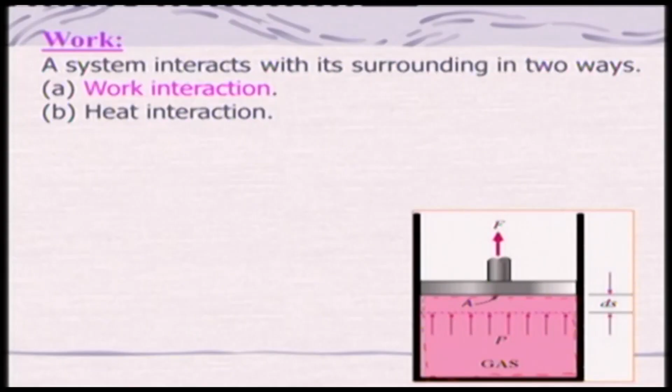which will be the system here, balanced by this force. And if this force is reduced by delta F, then the piston, earlier here, moves and its system boundary will increase. This is a movable boundary, right? And there is a displacement ds. So from the mechanics point of view, work is basically force into displacement, right?

As a result, you are at state 1 here, and as you go on decreasing the force, there will be an increase in volume of the gases in the system, and it will reach a steady state, another state 2. And all the time you can think that it is attaining quasi-equilibrium, because you are changing the force by a very very small amount, such that it will be attaining

mechanical equilibrium. One can also consider it a reversible process, because it is very slow, and there is no friction between the cylinder and piston or anything else which won't allow the system to move reversibly, or in other words, which would make the process irreversible. So from the mechanics point of view, the work done will be what?

If I take this tiny strip here, the piston has moved through distance ds, and the force acting is due to the pressure P from the system, and this is the surface area, so it becomes PA ds, and A ds is nothing but the change in volume. And if you integrate this between state 1 and state 2, you will get PdV, right?

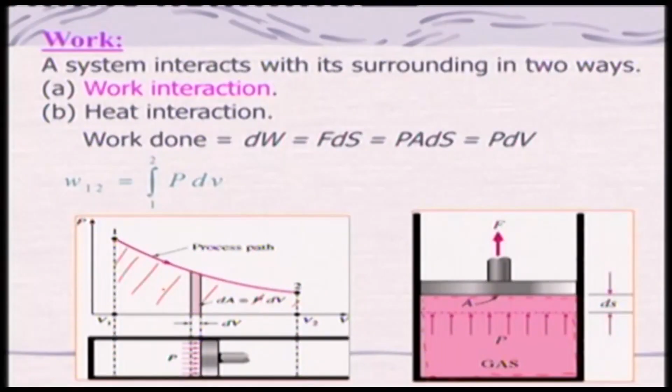And this integral is basically this area, which will give me the work done. That means in the PV diagram, this area will give me the work done, which can be expressed in kilojoules. Now, during this process, is the work possessed by the system or not?

See, if you look at the unit of work, it is kilojoule or joule, whatever you call it, right? But that is the unit of energy. Am I right or wrong? Yes or no? Is it energy? So, is work the same as energy?

Energy is possessed by the system, okay? Or if there is an interaction between system and surroundings, there will be a change in energy. But will there be a change in work also of the system? Actually, it is not. Basically, work is done by expending the energy. Okay, work is done by expending or by using the energy, right?

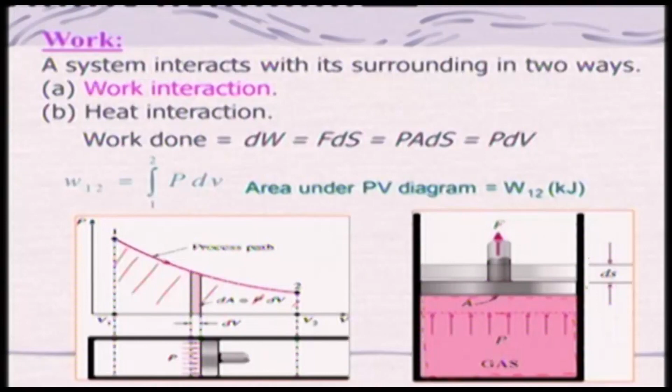But work is basically not the energy, it is the energy in transit. During the process it occurs. That means it is basically a boundary phenomenon. If you look at it this way, the piston is moving, right? Because that is the boundary, if you look at this, the system boundary is changing, right? Earlier it started here, and then after the displacement it has moved some distance. So therefore work, we call it a boundary phenomenon.

And it will be dependent on the path. Let's say it is going from state 1 to state 2; it can go through path A, path B, or path C, right? And if it is taking a different path, the work done will be different. For example, if it takes path A, it will be 10 kilojoule. If it is path B, it will be 8 kilojoule. And if it is path C, it will be 5 kilojoule in this example, right?

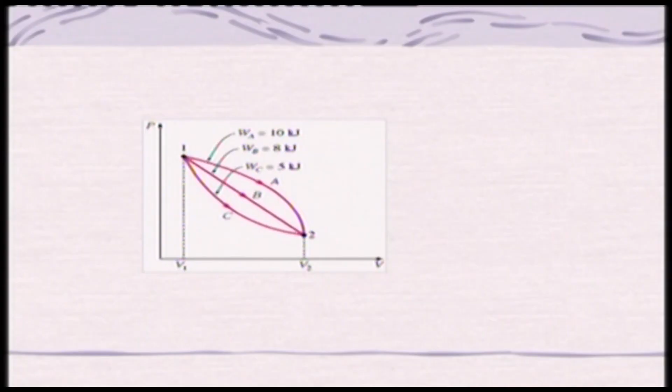That means work is basically dependent on the path. So therefore, work done can be considered a path function. It is not a point function. Whereas energy is basically what? Is a point function. Therefore, work is not a property of the system because it is dependent on the path. Energy is stored in a system but not work. Work cannot be possessed by the system, whereas energy can be possessed by the system.

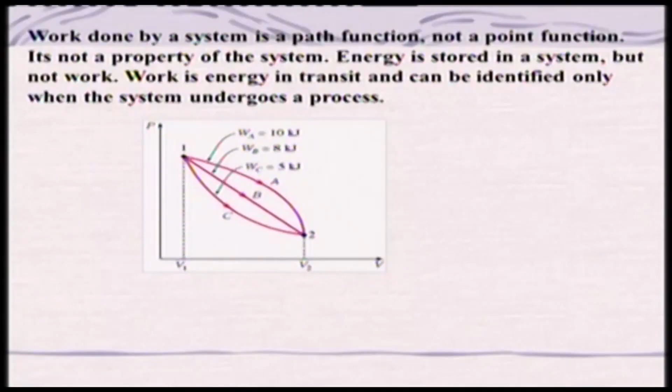So therefore, we call work energy in transit, which can be identified or manifested only when the system undergoes a process. If there is no interaction between the system and surroundings, then work done will be what? Will be zero, right? So therefore, one has to understand the difference between work and energy.

Let us take an example: a piston cylinder device initially contains 0.4 meter cube of air at 100 kPa and 80 degrees Celsius. That means volume is given, pressure is given, and also the temperature. Air is compressed to 0.1 meter cube in such a way that temperature inside the cylinder remains constant. This is basically an isothermal process. And we need to determine the work done during this process.

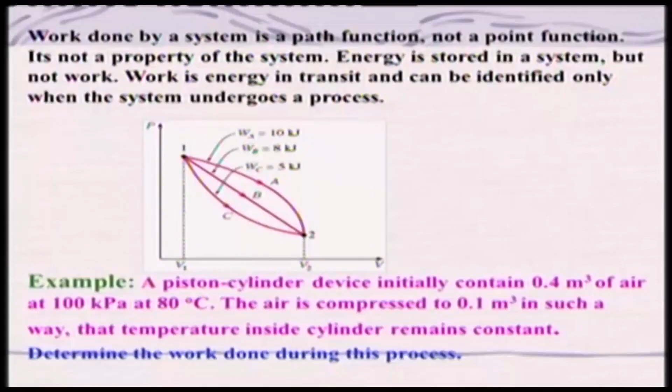So let us consider this is our system boundary, a piston cylinder arrangement with air at 100 kPa, initial volume 0.4 meter cube and temperature 80 degrees Celsius. It will be at state 1 here, and it will be compressed. That means we will be putting some weight here so that it is compressed such that the system attains a higher pressure, and we are assuming it is a quasi-static process.

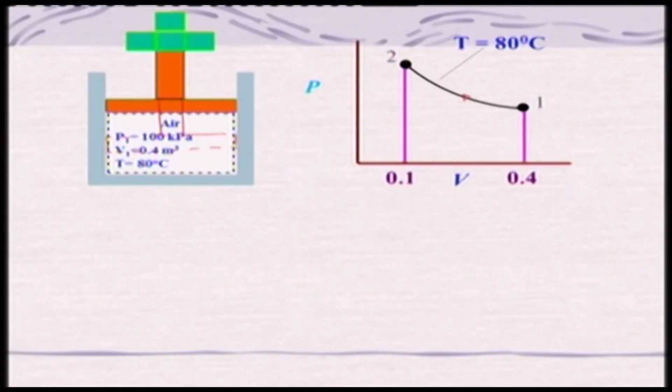So the process will go in this direction such that it attains state 2, at which the volume is 0.1 meter cube. Let us say the piston moves through this process. This is your state 2. So we need to find the work done. These things are given: V1 is 0.4 meter cube, V2 is 0.1 meter cube, P1 is 100 kPa and temperature 80 degrees Celsius.

So what we'll do, we can apply the ideal gas law. We know that PV is equal to mRT, and R here is the specific gas constant. If temperature is remaining constant, and mass is remaining constant inside the system, then this term is basically a constant C. So we get a relationship between P and V: P is equal to C by V.

And if we take work done equal to the integral of P dV from 1 to 2, you can put this relationship between P and V here and integrate it. We know that C is nothing but P1 V1, and with V2 and V1, you put in all the numbers, and you will get the work done equal to 55.45 kilojoule. Now this is coming with a negative sign. What is the meaning of that?

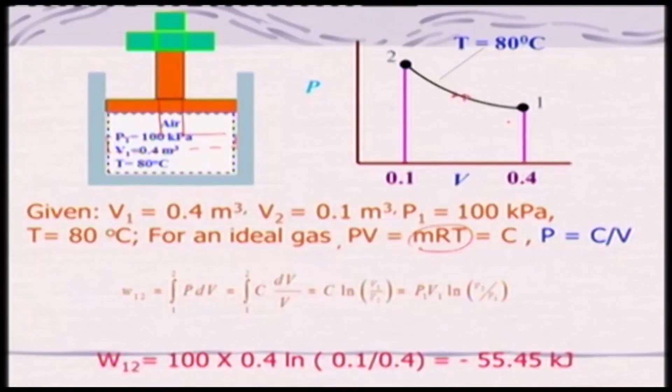Suppose I am at station 2 and I will be coming to station 1 following the same path, then I will get the same work done, 55.45 kilojoule, but with a positive sign. That means the work is done by the system on its surrounding. Is that clear? Okay.

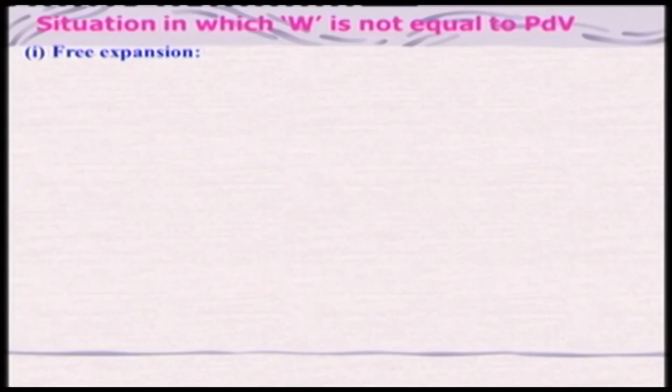So now let us take a situation in which work is not equal to PdV, because we have seen this is the PdV work, okay. But we can consider a situation where PdV is not there in picture. Let us say we will consider a free expansion. I will be taking a few examples for that. Let us say that there are two chambers. Chamber 1 contains gas at P1 V1 and chamber 2 is a vacuum.

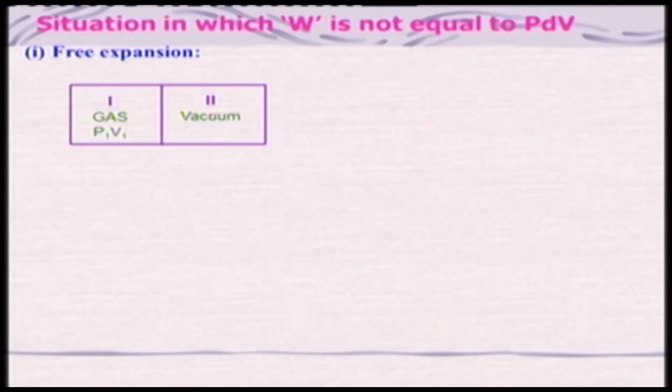Now there is a partition here, I can remove this partition, okay, and the pressure here is vacuum. So what will be the work done? Let us do it another way. For example, I will place several partitions here. These are all partitions, right? I will remove the first partition. Then what will happen? The volume became V1 plus VA1. This is your chamber 2, VA1. This became the new volume, okay.

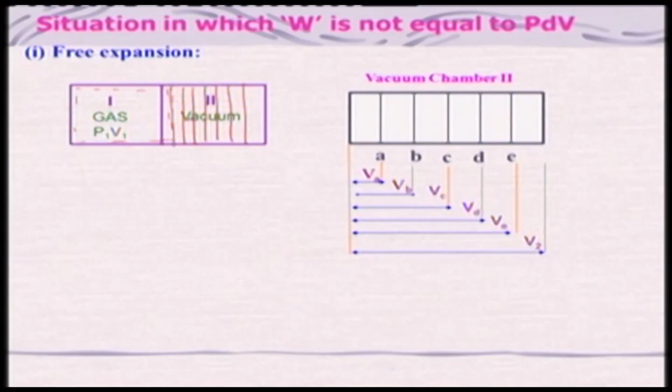Then what will happen? The pressure will change, am I right? Because the gas is the same in the system, and earlier it was in chamber 1 and the volume increased, so the pressure will be reducing, am I right? So you can think of the pressure at 1 here, and if the partition is removed, you will go to point A.

And similarly another partition is removed, you will get B, C, D, like that. All the partitions you will be removing, and you can come up to point 2. You can say, look, I will take this area and say that this is the work done in a PdV sense. Is it true or not? Actually it cannot be. That is the reason I have put this dashed line, to indicate that it is not a reversible process, okay.

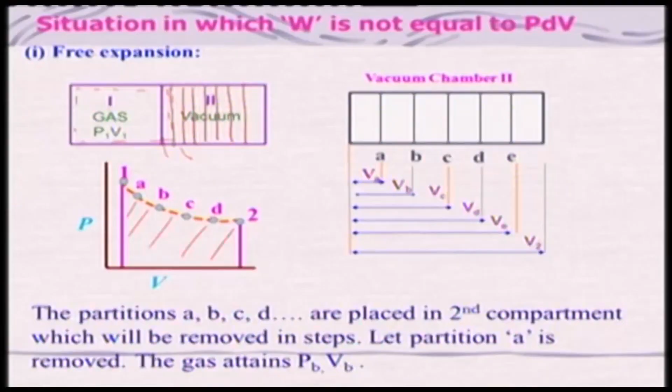Generally when you draw a process diagram in thermodynamics, particularly classical thermodynamics, we use a solid line for a reversible process, and for an irreversible process we use a dashed line. That convention you should keep in mind. But the important point is, the work done will not correspond to this area I have shown. Why?

What will be the work done? Work done will be 0, because the expansion of gas is not restrained by an equal but opposite force at the moving boundary, because all the time it is experiencing 0 pressure. So it cannot be as such. And no external force is moving through a distance, because the vacuum is remaining there. So work done due to free expansion will be 0.

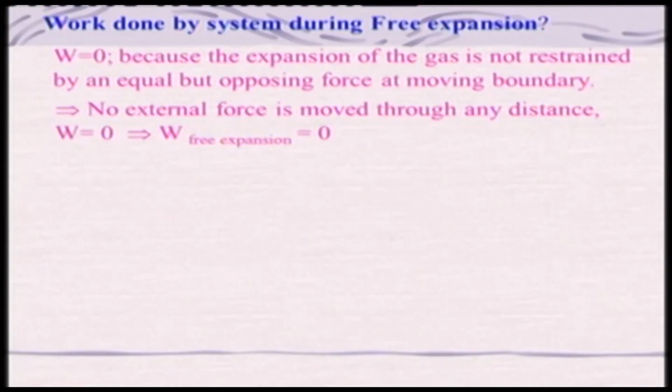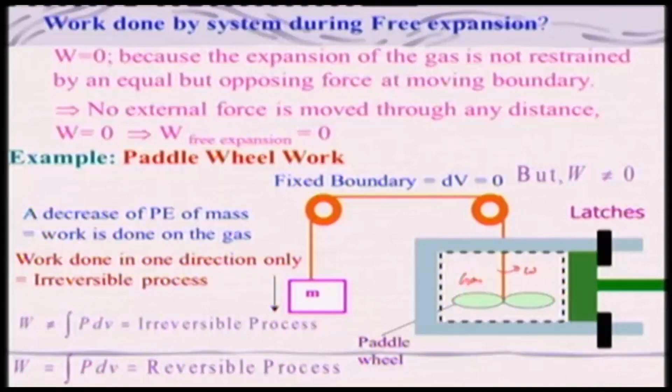It cannot be rotated in the opposite direction. That's all we can do, right? Okay, but it will not be reversible, and the work done in this irreversible case is not equal to PdV. However, for a reversible process we call it basically the PdV work, right?

That means the system is doing some work on its surroundings. Surroundings in this case means the resistance, right? Now you understand what I call surroundings. Can I say air is the surroundings? No. It is the resistance which is the surroundings, and which is acted upon by this system.

So now I want to find out how much work is done by this. With the definition, force will be acting through a displacement, or PdV work. Can I do that? In other words, is there any work done by the battery? Of course it is being done. Am I right? Yes or no? Because otherwise how would the resistance get the heating effects?

You can measure the temperature near the resistance and find there is a change whenever the switch is on and the battery is connected to the resistance, right? From the definition of work in mechanics that we have discussed till now, the work done in this case will be 0. Why? Because there is no force moving through any distance.

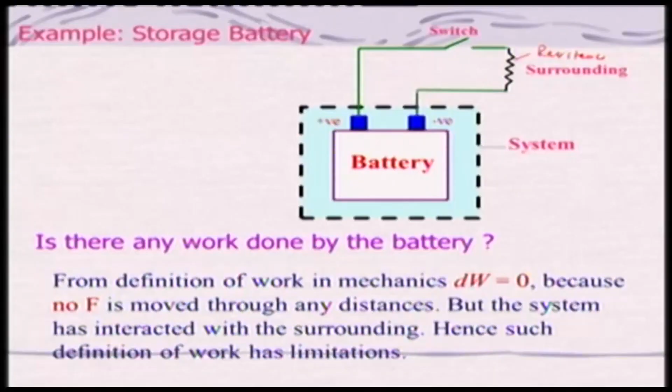However, as I told, the system has interacted with its surroundings, that is the resistance. Hence, the definition of work from mechanics has a limitation, right? It does not really work for everything we will be handling in thermodynamics, like the battery and lots of non-PdV work. So therefore, we need to define work in the thermodynamic sense, right?

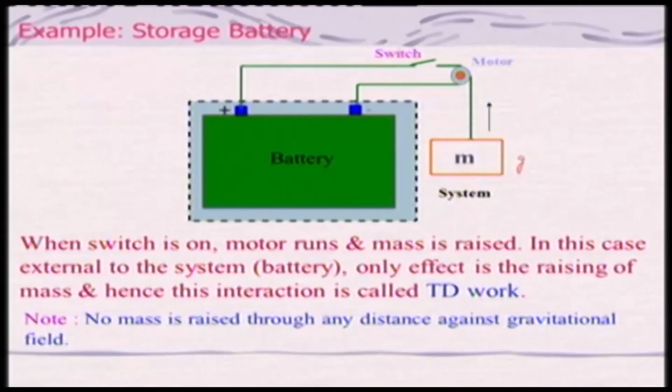So when the switch is on, the motor runs and the mass is raised. I have already explained this. In this case the system is the battery, and external to the system the only effect is the raising of the mass, hence the interaction is called thermodynamic work. Keep in mind that no mass is actually raised through any distance against the gravitational field. We are just adding this concept so that you can fit it into the thermodynamic definition.

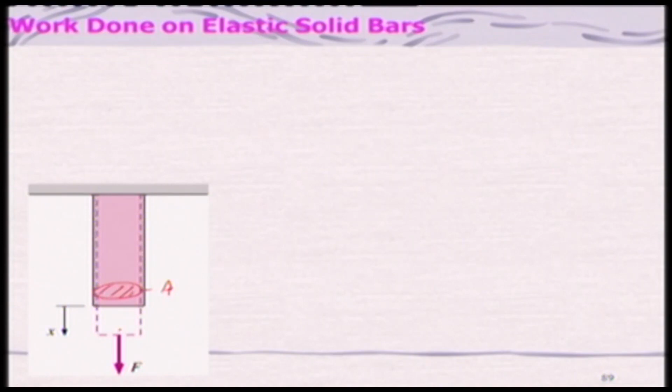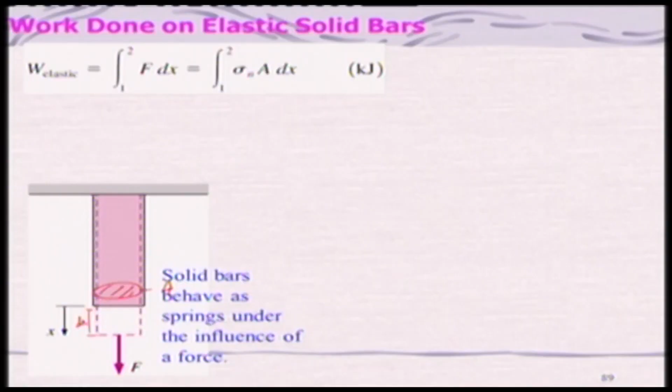One can also think of the solid bar as behaving like a spring whenever the force is applied within the elastic range. Of course, in the plastic range it cannot. So the work done is basically force into displacement. With displacement dx, this is nothing but F dx. And the force can be expressed in terms of normal stress, because when this force is applied the material will resist and develop a stress, and this force is perpendicular to the cross-sectional area of the bar. So this is the normal stress. You can integrate this and get the work done.

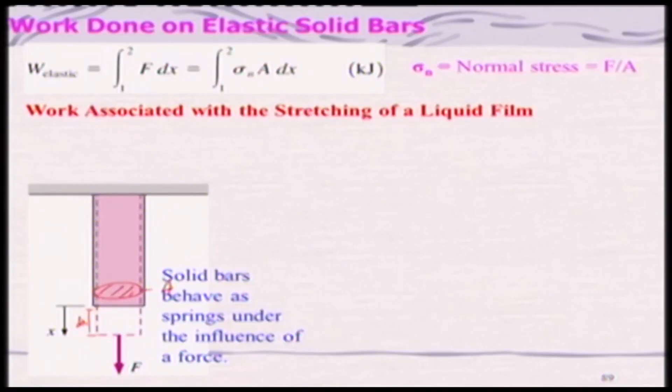Now the work associated with stretching a liquid film. Let's say there is a movable wire with a rigid frame. If you dip this frame in soap solution and remove it, you get a film whenever you apply a certain force. This film is formed due to surface tension. You might wonder what you will do with this. Droplets are formed due to surface tension force, and so are raindrops and other things. And you can use this film for flow visualization in fluid mechanics.

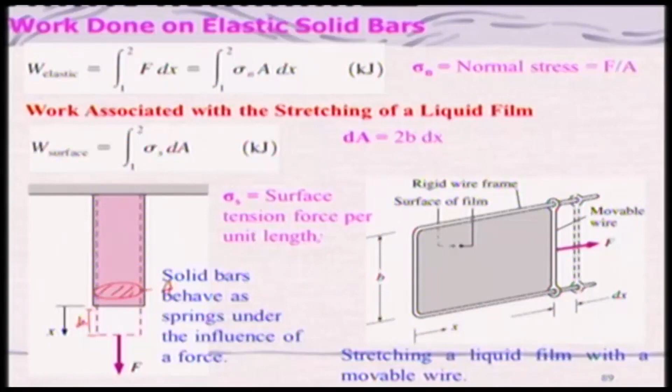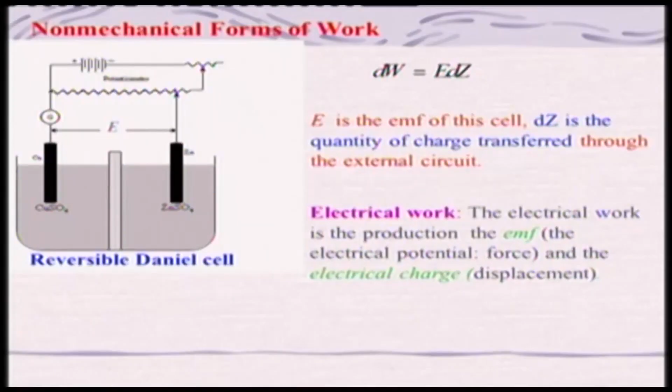So the work done will be nothing but E dz, where dz is the quantity of charge transferred through the external circuit, like this is your external circuit. And this is basically a non-mechanical form of work. There will be electrical work. Electrical work is basically the product of the EMF, that is the electric potential, or there is basically a force, and there will be a displacement. One can think of electrical charge moving, and then we can find out some kind of work.

Similarly, magnetic work is basically defined as the product of magnetic field strength and the total magnetic dipole moment. So there are various forms of work one can think of, which we may deal with some time, but most of the time we will be working with the PdV work. And in some situations we may look at non-mechanical works, which we can call non-PdV work. So various forms of work you may brush up and see.

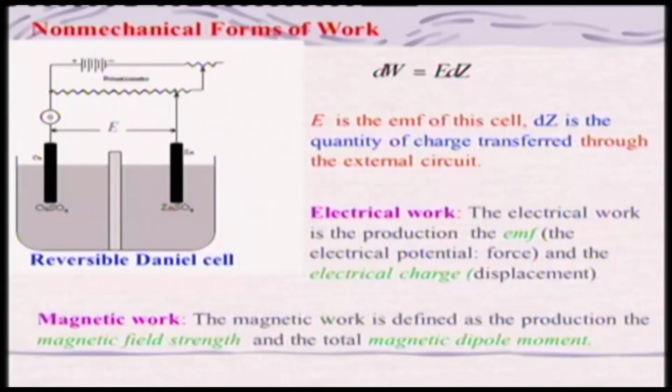Let us now generalize by considering various modes of work. We have taken compression and expansion, from the mechanics point of view, where the general force is your pressure and the general displacement is dV, change in the volume, and the work will be P dV. In case of a solid rod, which is elastic in nature, in the elastic regime, we can talk of the normal stress and the strain volume change, giving sigma n dV.

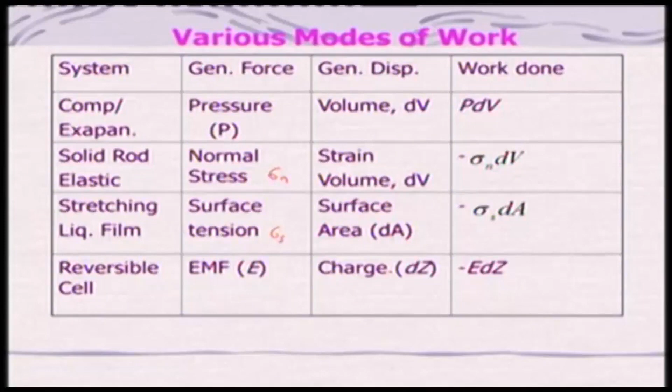We have also seen the stretching of a liquid film, with the surface tension force per unit length, and then surface area comes into the picture, and we get sigma s dA. Similarly, in the reversible cell, the EMF E is changed, making the charge move either from the cell to the surroundings or from the surroundings to itself, and we call it E dz. So you can put it in a very general form: the work done is equal to Fk, a generalized force, times dx, a generalized displacement.

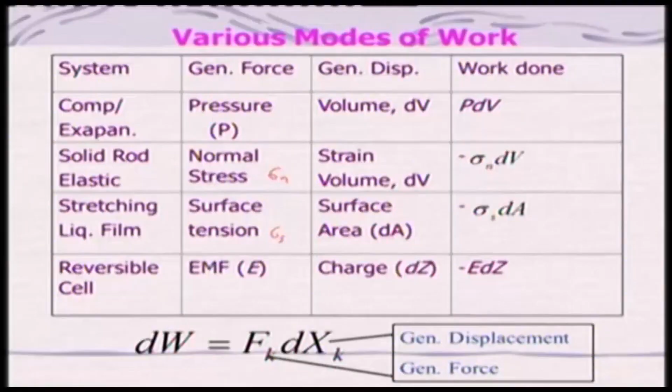Although we started with criticizing the mechanics definition of work, we are trying to assimilate all the forms of work in this form, which comes within the realm of the thermodynamic definition of work. So therefore we will be using these various modes of work. As I told earlier, work is basically energy in transit. It is not the same as energy, and it is dependent on the path of the system, unlike energy, which is possessed by the system and is a point function, a property of the system, whereas work is not a property of the system.

So these are the things we will be dealing with, and in the next lecture we will look at heat interaction. As I told, a thermodynamic system interacts with the surroundings in two modes: one is work, the other is heat. So in the next lecture we will be discussing heat interaction.